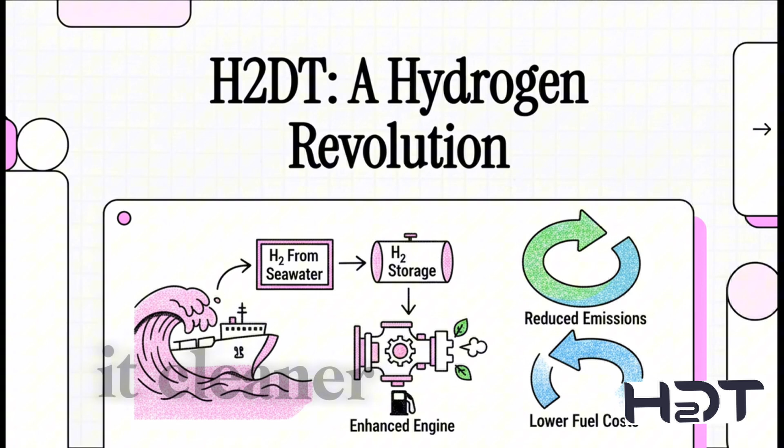Global shipping is pretty much the backbone of our world economy, but it has a huge problem. Today, we're going to dive into a breakthrough technology that promises to completely transform this colossal industry, making it cleaner and cheaper. Not in 30 years, but like right now.

Let's get into it. Okay, so to get a sense of just how big this challenge is, think about this. Right now, there are about 50,000 of these massive commercial ships sailing our oceans. That's 50,000 engines, many of them the size of a small house, just constantly burning fuel.

And all that fuel, well, that's where you find the industry's big, dirty, and very expensive secret. For decades, it's just been this trade-off between keeping the economy moving and the environmental damage. But that whole era, it's coming to an end.

So what you have here is a real perfect storm for the shipping industry. You've got fuel prices just shooting through the roof. Then there are the emissions. We're talking CO2, nitrogen oxides, all that nasty particulate stuff. And regulators are watching like a hawk. All of this is happening while the basic costs to just operate and maintain these ships keep going up and up. And look, this isn't just some friendly suggestion.

We're talking about hard and fast rules. The International Maritime Organization, the IMO, has put some serious deadlines in place. So by 2030, they need to slash carbon intensity by at least 40%. By 2050, cut total greenhouse gas emissions by half. The message to ship owners is pretty simple, right? Change, or you're going to get left behind.

Okay, so we've laid out this huge, urgent problem. What's the fix? Well, let's look at a solution that honestly sounds almost too simple to be true. And it starts with something they have an endless supply of right under the keel.

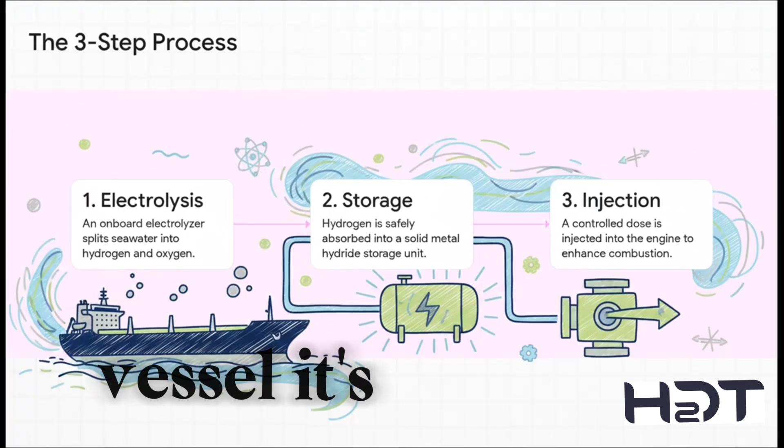So how in the world do you actually turn seawater into power? Well, the beauty of it is just how simple it is. Let's break down how this thing actually works when it's on a vessel. It's this really elegant, totally self-contained three-step process.

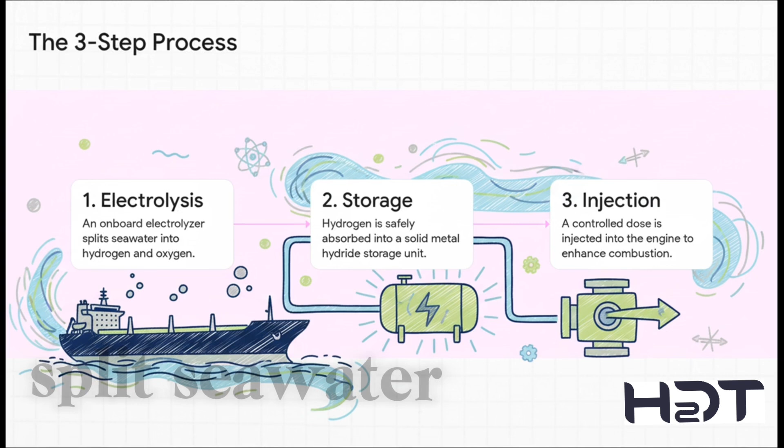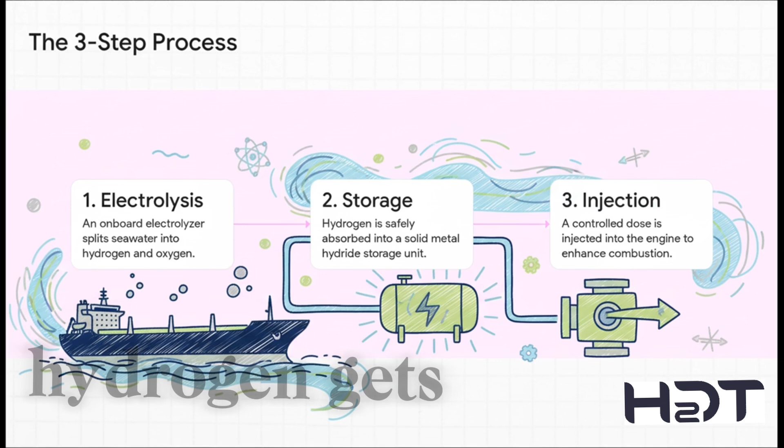Okay, first, you've got an electrolyzer right on the ship. It takes a little of the ship's power and uses it to split seawater into hydrogen and oxygen. Simple enough. Then, and this is the clever part, that hydrogen gets safely soaked up and stored in a special solid material. And finally, a super precise dose of that hydrogen gets injected straight into the existing diesel engine, which makes every single drop of fuel burn way cleaner and more efficiently.

Okay, this storage part is really cool. Because, when most of us hear hydrogen, our minds jump to these high-pressure tanks, right? The kind that could be dangerous. But that is not what's happening here. This metal hydride stuff is more like a high-tech metal sponge. It literally soaks up the hydrogen at low pressure, bonding with it chemically, and it only lets it go when you ask for it. It's just inherently safe.

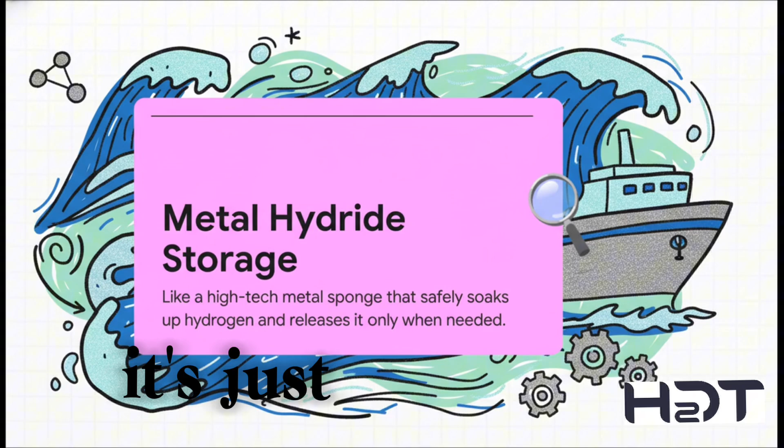All right, so it's safer, it's way more practical, but what about the money? Does it actually make sense financially? Well, this is where the story gets really interesting. Because the payoff here isn't just about being green. It's about saving a ton of green.

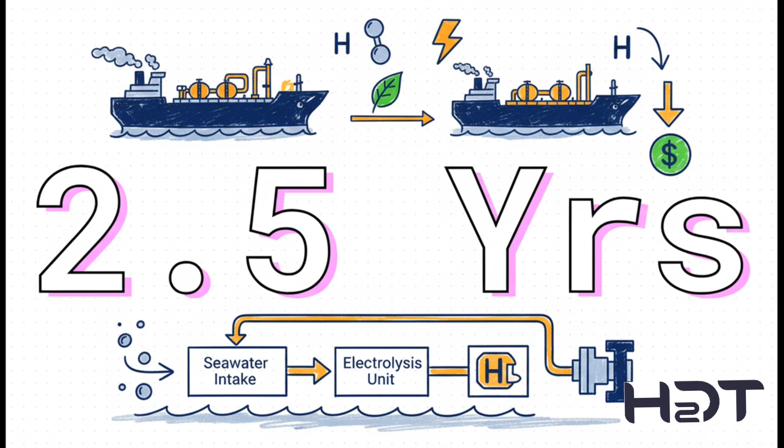So yeah, it all comes down to that payback period, right? And get this, projections show a full return on that investment in as little as 2.5 years. And after that, every penny you save on fuel, plus savings on maintenance, which can be up to 30%, that's all pure profit, straight to the bottom line.

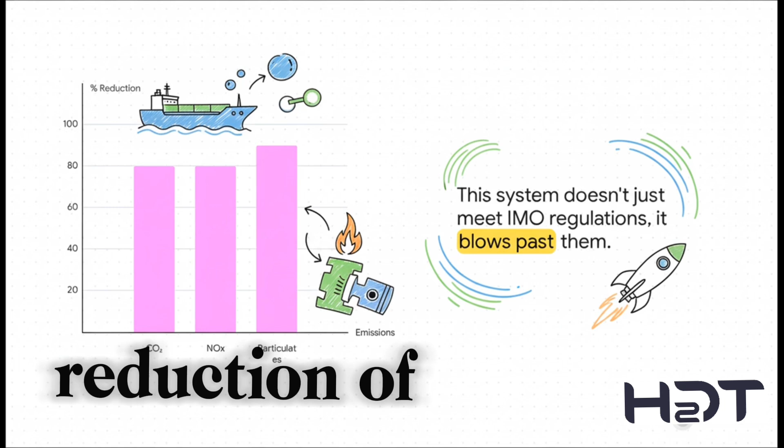And here's the kicker, while you're saving all that cash, you're also doing this. Just look at these numbers: a CO2 reduction of up to 80%, plus huge cuts in NOx and all that other nasty stuff. This doesn't just meet those crazy strict IMO regulations we were talking about earlier, it absolutely smashes them.

Okay, but let's be real, this solution isn't the only game in town. There are other green technologies out there trying to clean up shipping. So you have to ask, why is this one the winner? What gives it such a huge edge?

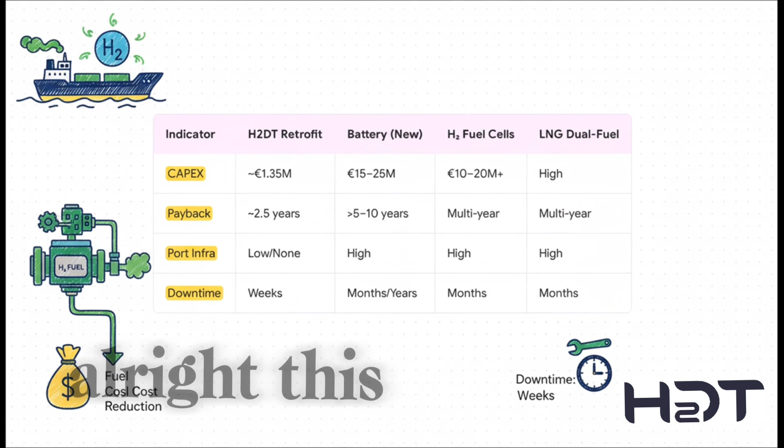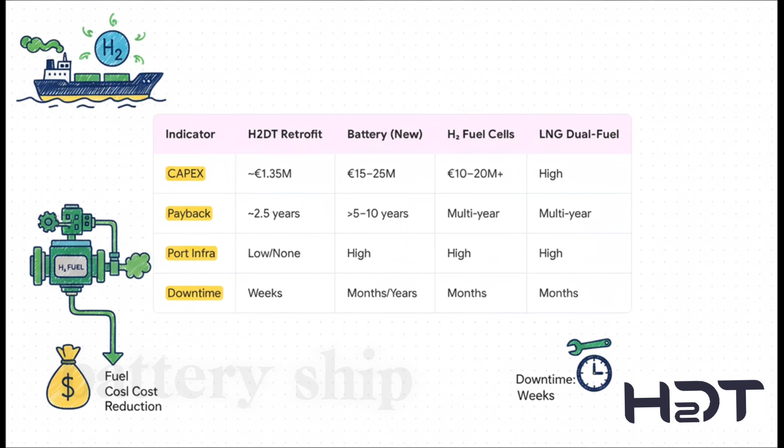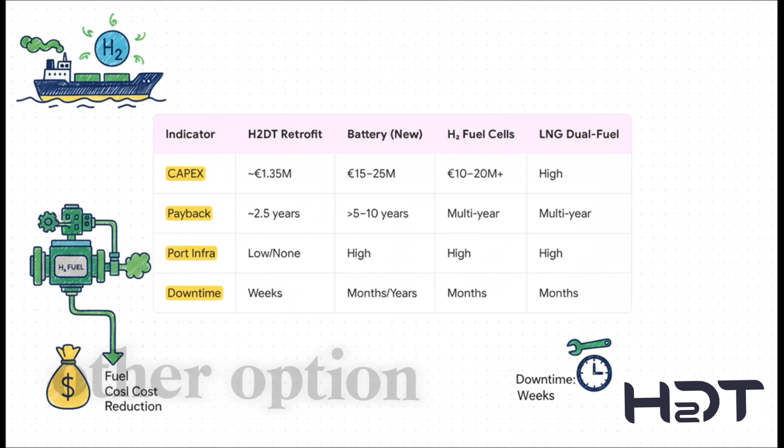All right, this slide right here is basically the mic drop. Just look at this: H₂DT retrofit versus everything else. The upfront cost, €1.35 million, versus what, €15 to €25 million for a new battery ship? No contest. Payback is 2.5 years versus maybe 5 to 10 years if you're lucky. But that third row, port infrastructure, that's the killer. H₂DT needs little to none. Every single other option needs massive, ridiculously expensive new projects at ports all over the world.

So let's just boil it down. What's the unbeatable edge here? It's a fast and pretty low-cost retrofit for the ships that are already out there. You don't have to build a whole new fleet. It bolts onto the diesel engines they already have, gives them a proven, fast ROI, and, this is huge, it does it all without needing a single new port mega project.

It's a solution for the world we actually live in, not some fantasy future. So when you got a solution that is this practical for a problem that is this big, well, the numbers are about to get absolutely staggering. We are talking about a market opportunity that is just massive. Okay, remember those 50,000 ships we talked about at the beginning? Well, the analysis shows that about half of them, a whopping 25,000 vessels, are perfect candidates for this exact retrofit. That is just an enormous market waiting to happen.

And if you do the math on that, you're looking at a total addressable market somewhere in the neighborhood of 30 billion euros. This isn't some tiny niche product, you see. This is a foundational technology for a whole global industry.

So all of this, it really leads to one final, pretty provocative question, doesn't it? We're always talking about clean tech for the future, right? Things that are decades away, that'll cost trillions of dollars to build out. But when you have a solution right here, right now, that's cheaper, that's safer, that's faster to roll out, and that works with the stuff we already have, it really makes you wonder, maybe the future of green shipping isn't something we have to wait for. Maybe it's already here, just waiting to be installed.